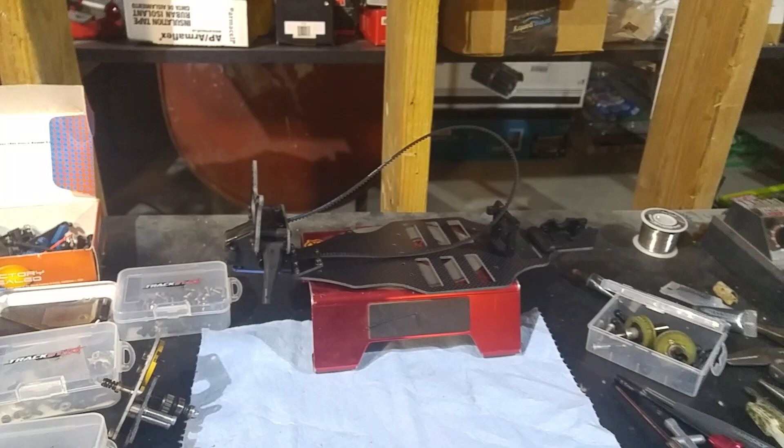Okay, so as you can see, I've made some progress here, finally, on my Kyosho Lazer ZXS Evolution restoration.

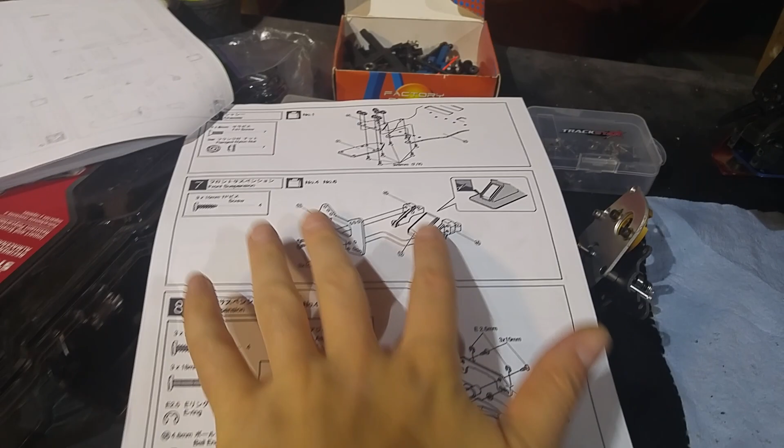I am doing a fair amount of this out of order, just out of personal preference for how to do the build. So the way the build starts is you start with the front kick-up plate, and then you put the top half of the front gearbox together, and then you do basically the whole front gearbox.

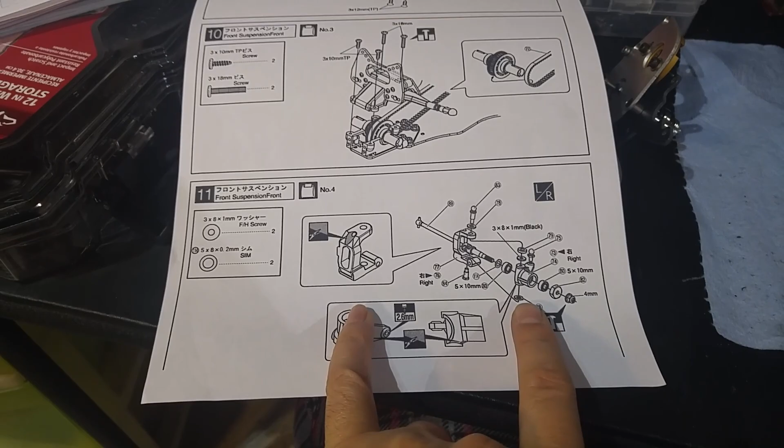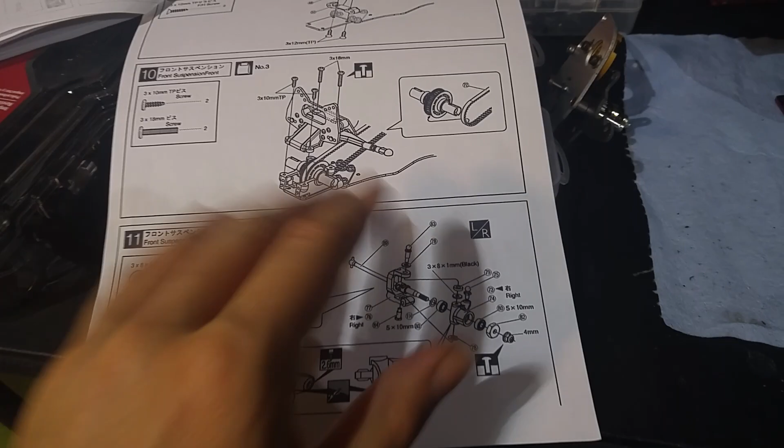Then you move on to the front part of the front suspension. So anything related to putting on turnbuckles, ball cups, caster blocks and steering knuckles, I'm going to wait till later for that. First thing I want to do is get the gearbox and drivetrains done, and then I'll move on to the suspension components.

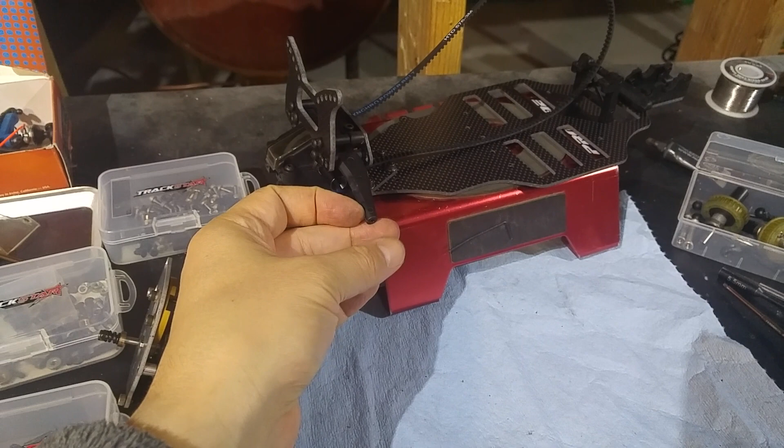That's just the way I prefer to do it. Also, I do want to get replacement turnbuckles because this comes with the original steel units, and I'd rather get titanium turnbuckles. I also noticed that the turnbuckles that go on the front here are like 15 to 16 millimeter units, and they're different between the left and right.

I think one of these is titanium, possibly this one. This one looks like a steel unit, clearly a different adjusting nut. So I just want to get the same of everything. I've got to put these aside and get new units. That's another reason why I'm waiting to do the suspension bits.

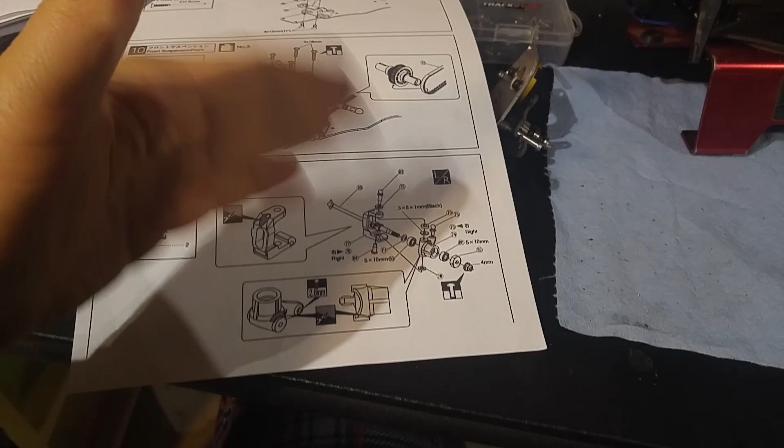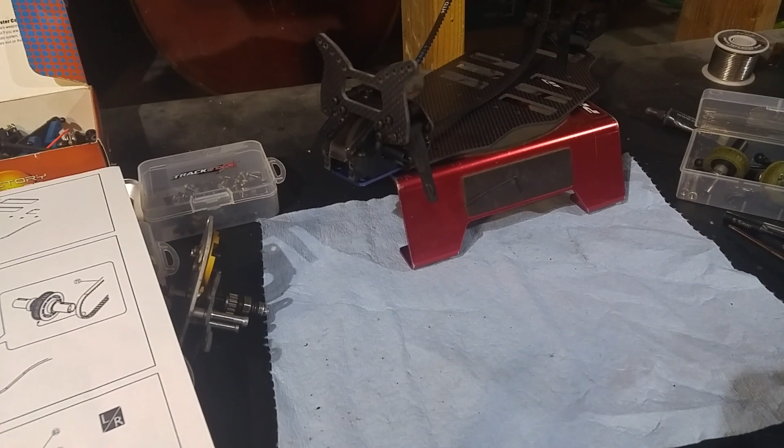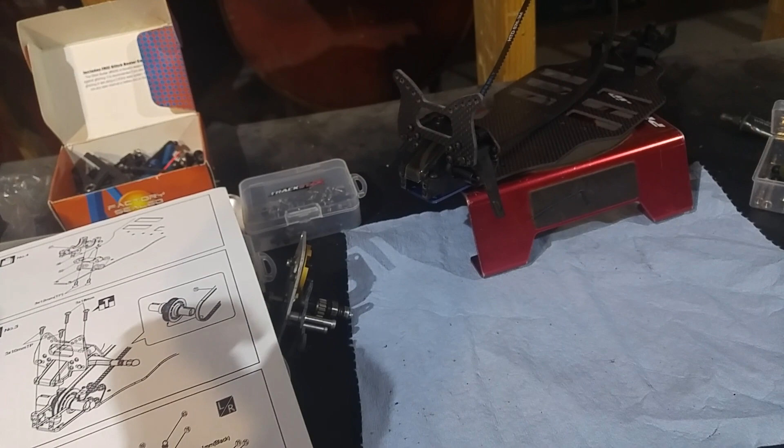So in any case, what have I noticed so far? Well, the front gearbox is certainly more difficult to put together than on a normal Lazer ZX or ZXR, because on the Lazer ZX, it's a two-piece gearbox. You have a front section and a back section, and the diff pulley mounts in from the front.

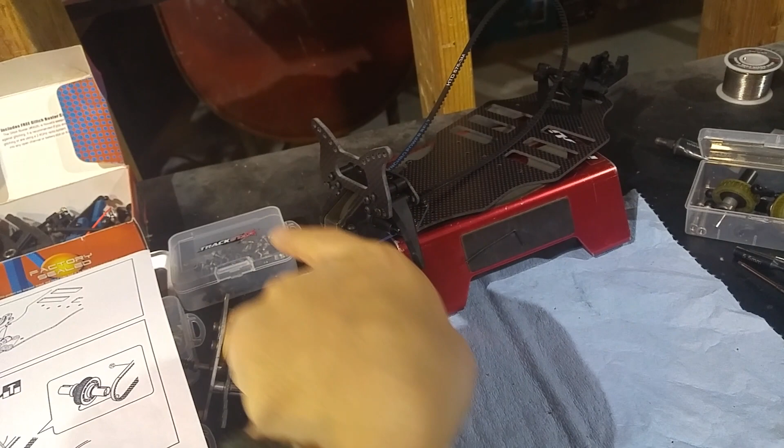With the diff pulley - my vocabulary is off today - the diff belt just comes in and wraps around it as you mount it in, and then you put the front cover on and bolt it on.

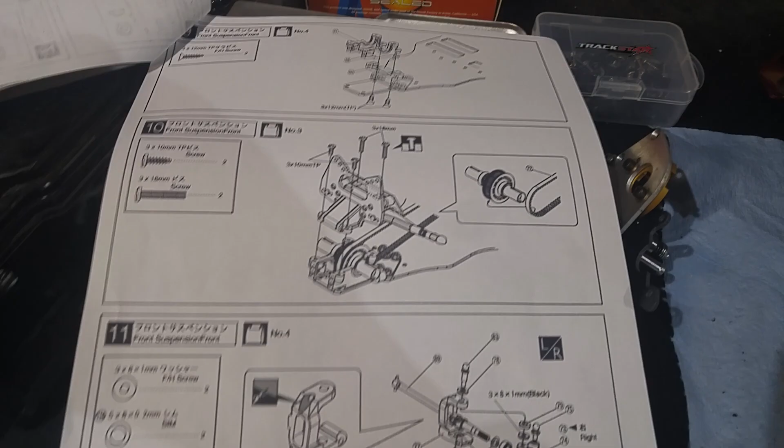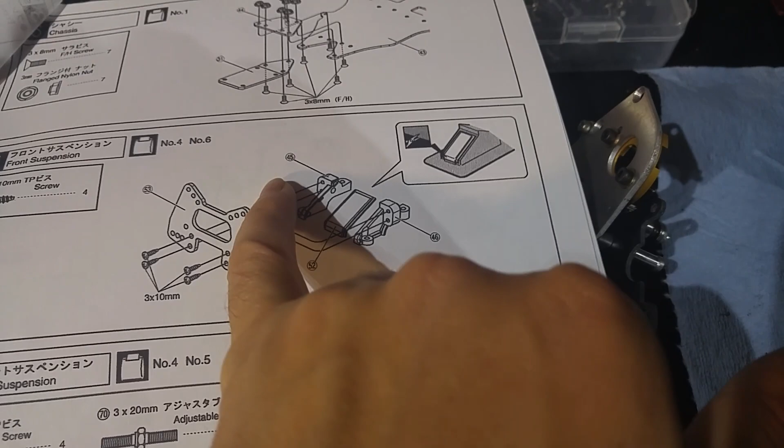This one has 4 quadrants for the gearbox: a lower left and a lower right, and then an upper left and an upper right. Putting the top section together is the most challenging because the way the left and right attach is through the front shock tower, so you're basically balancing 3 or 4 parts against each other.

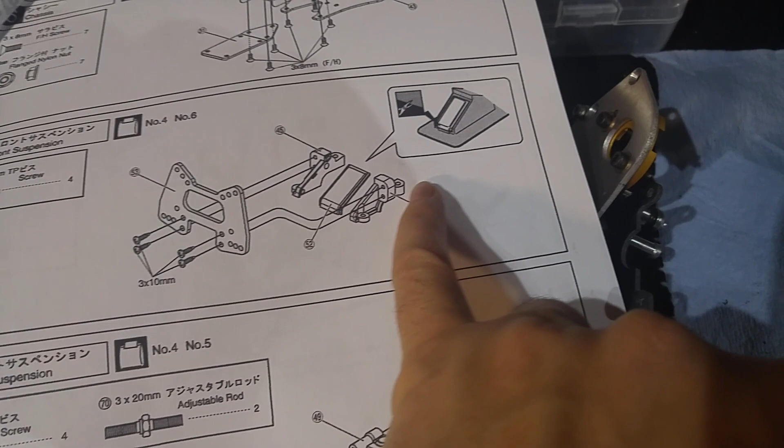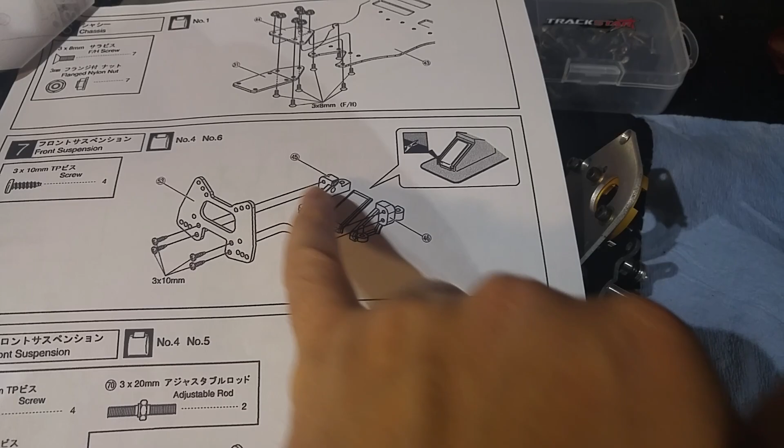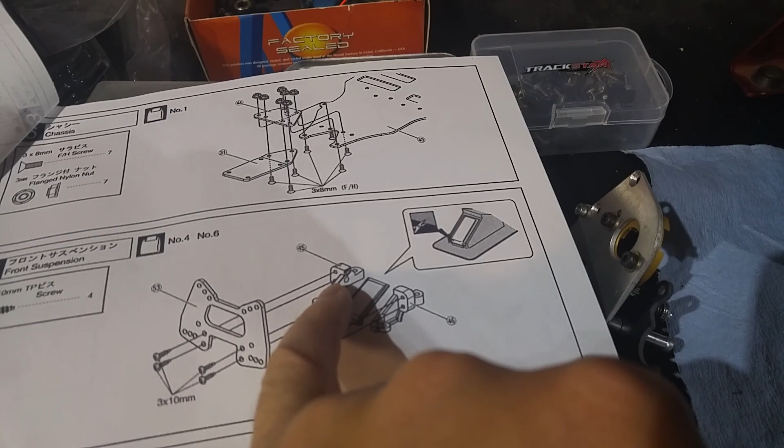So for instance, you might take these two screws, put them through the tower, into the top left quadrant of the front gearbox, and then you have this Lexan piece that goes in the middle between these two. That's this guy right here, your dirt protection cover. You have to hold that in place.

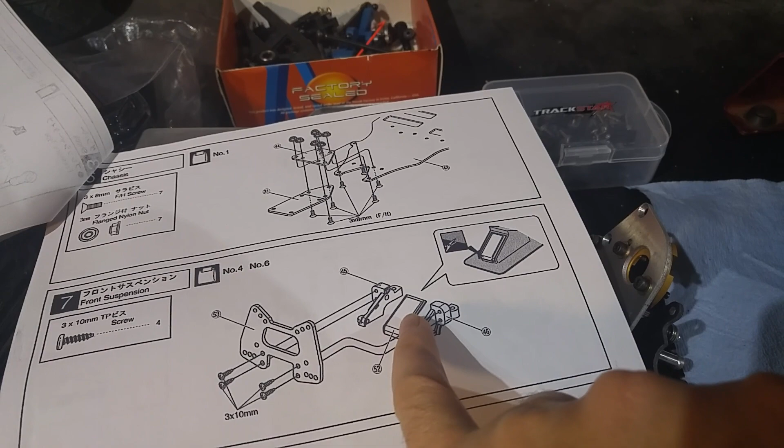There's nothing, I guess you could glue it, but there's nothing to actually secure that in place while you're mounting the other half of the top of the gearbox to the front shock tower. So you have to hold this in. There's a little notch in here where it kind of slots in, so you put that in, notch this one into here, and hold this in while you're screwing this in. It's a little difficult to do with just two hands, but clearly it's manageable, just kind of a pain.

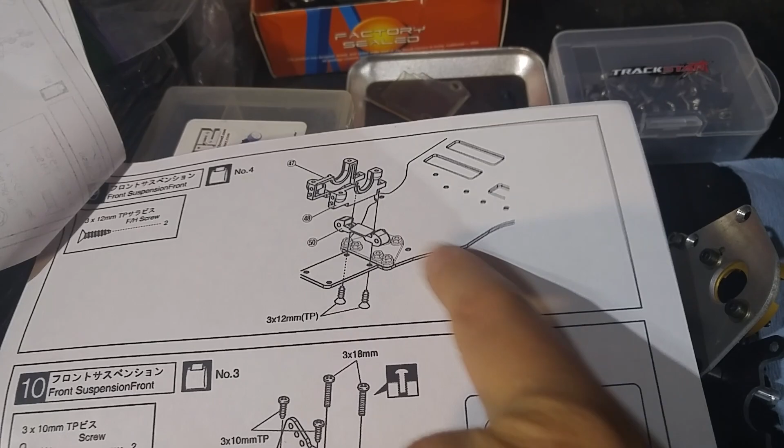So you do that, and then you mount the lower section. As you're screwing in one side here, this other side is going to try to move around, so trying to hold all that in place without it misaligning as you're tightening it down is also not fun.

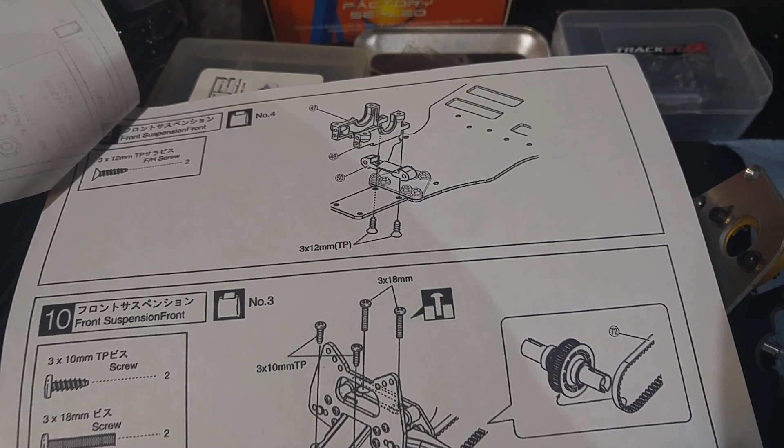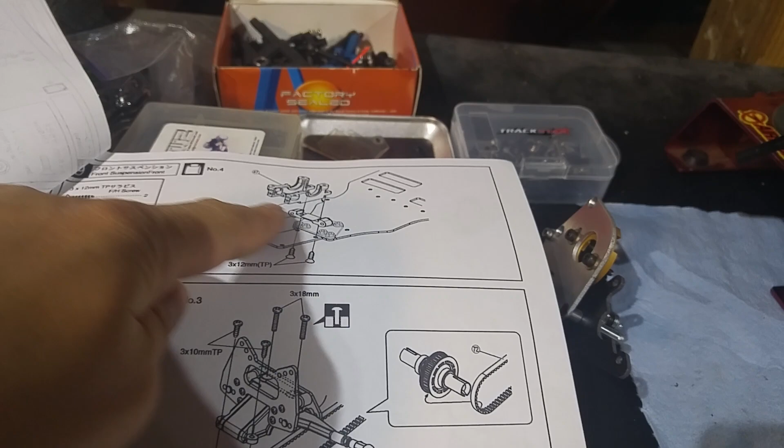This is the front rear inner hinge pin mount. This does look a little bit fragile. It's a different unit than what you have on the ZX and the ZXR. I think because on the ZX and ZXR the chassis was flat, and on the ZXS and ZXS Evo you have that front kick up to the chassis. So they had to redesign this inner hinge pin mount to accommodate that kick up, which means the inside of this is actually a little bit thinner than what you have on the ZX or ZXR inner hinge pin mount.

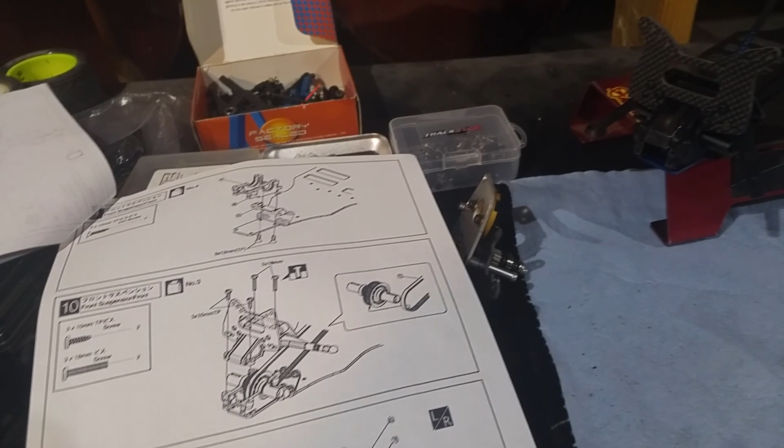That's another reason why I got all these 3D printed reproduction parts. I expect to order a couple sets of these just for my own internal consumption, because I don't know exactly what I can expect to break on the racetrack if I do race this.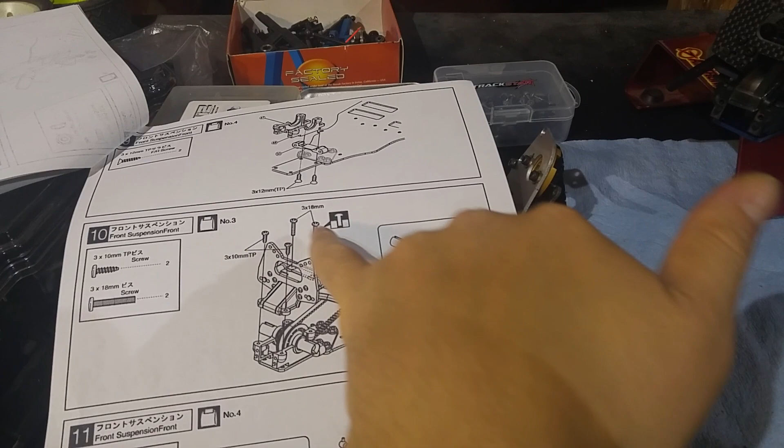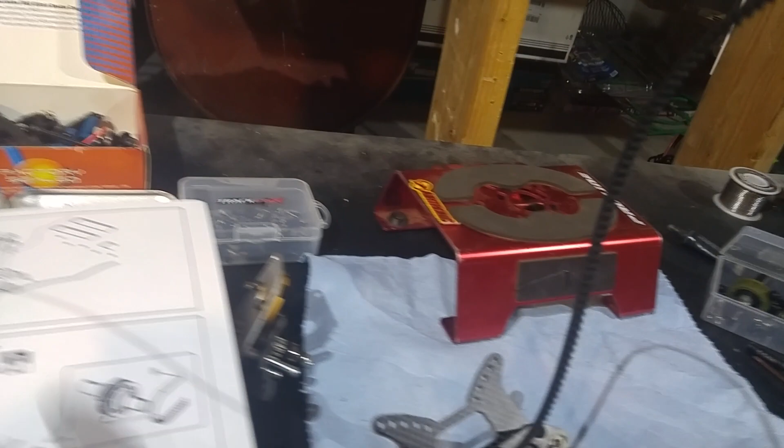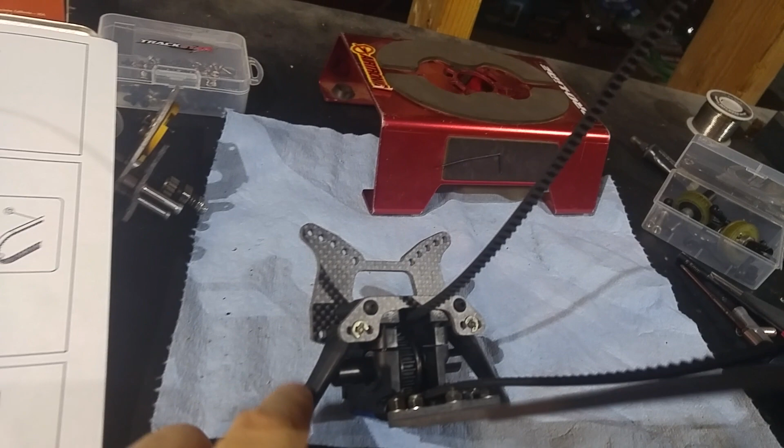Anyway, moving on. So then you put the diff in, you mount this, you screw this thing on. These back two screws here, you don't fully tighten them down because there's a gap between the top section, this piece here, and the top section of the gearbox. The upper deck is going to slot into there, and these back two screws are going to mount through that. So you don't tighten these all the way, just screw them in a little bit to hold it in place, and later on you take these out, put the upper deck in, and screw it back down. Okay, fine.

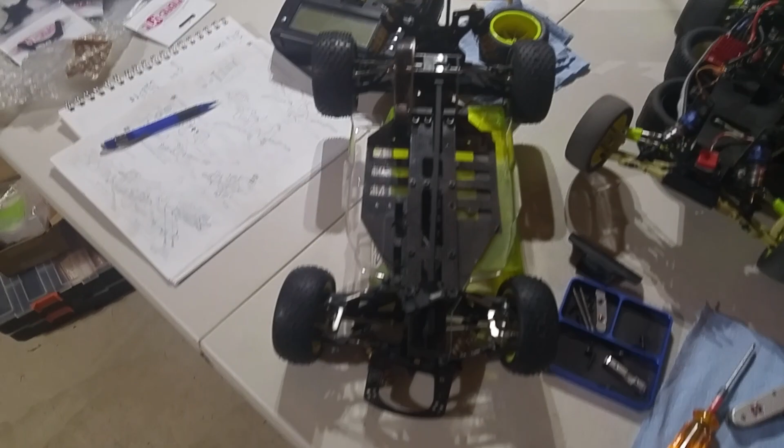So that goes together. What I am doing is replacing these diffs. I actually have over here a Laser ZX that I built some years ago, maybe 9 years ago or so by now. This was my first Laser project car, and I did get brand new diffs for it when I built it, brand new, slipper clutch, everything.

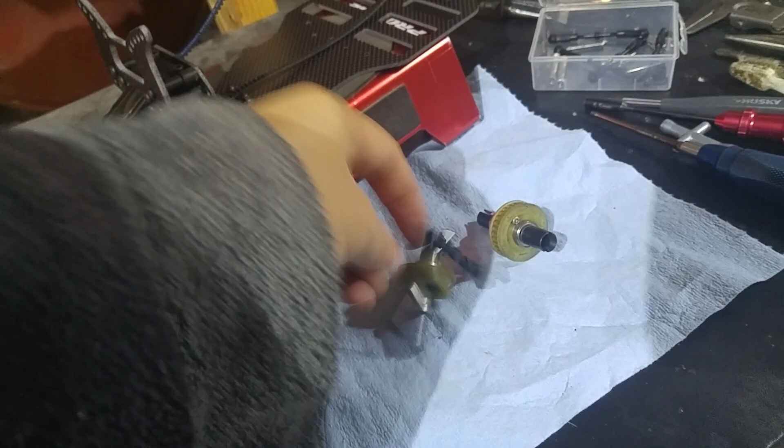And it was just sitting around, and I wanted the correct diffs, so to speak, the original style diffs for this gearbox, or for this Laser rather. Because these diffs here, one of them is actually a front one-way unit, and the other one is a ball diff, but the actual pulleys, as you can see, are white. And all the Laser models, the ZXR, the ZXS, came with black diff pulleys. So these particular pulleys, I believe, might be from Team Atlas. They could be aftermarket pulleys.

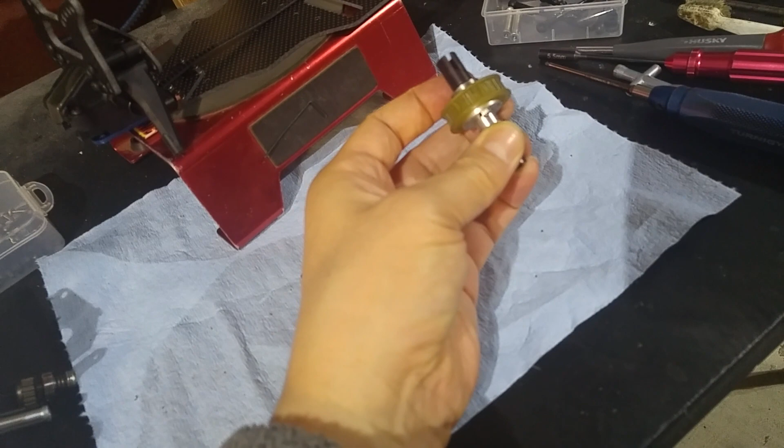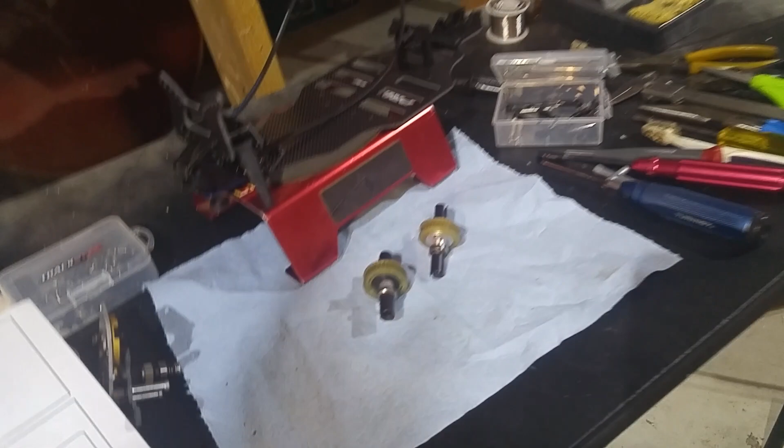Okay, fine, that's no big deal. But I like to have matching front and rear pulleys, and I don't want to use a front one-way. I hate one-ways. So if I'm just going to have one white pulley and one black pulley, I'd rather have two black pulleys front and rear, which means I gotta take that car apart and move those diffs to here. Those are brand new diffs, they've just been sitting in that car for years, but brand new. So I'm gonna put them in here and actually give them some use.

As to what I'll be putting in there, maybe I'll actually clean these up and put them in that Laser, because that Laser is more of a shelf car anyway. So that's probably what I'll do with these.

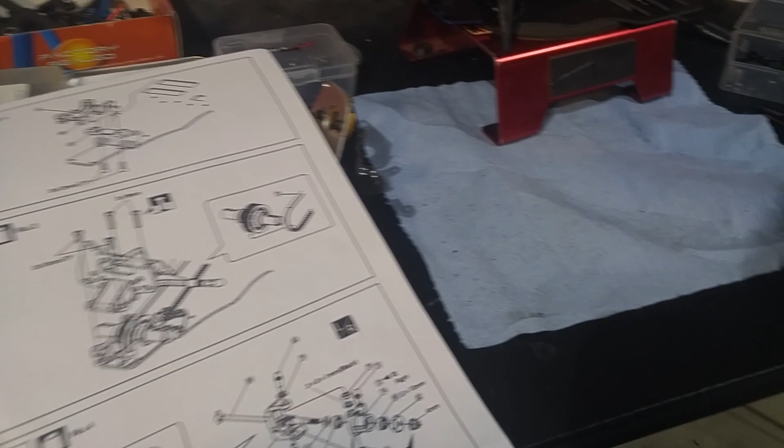Okay, moving on. So the front gearbox is kind of set. While I'm at it, I want to comment a bit on something. Even though the front gearbox is kind of a pain, there is something about it that I do like compared to the ZXR style gearbox, and it has to do with the types of belts you can use.

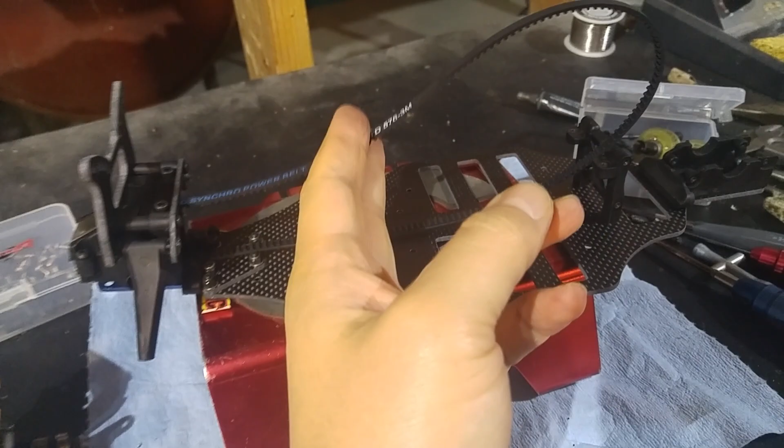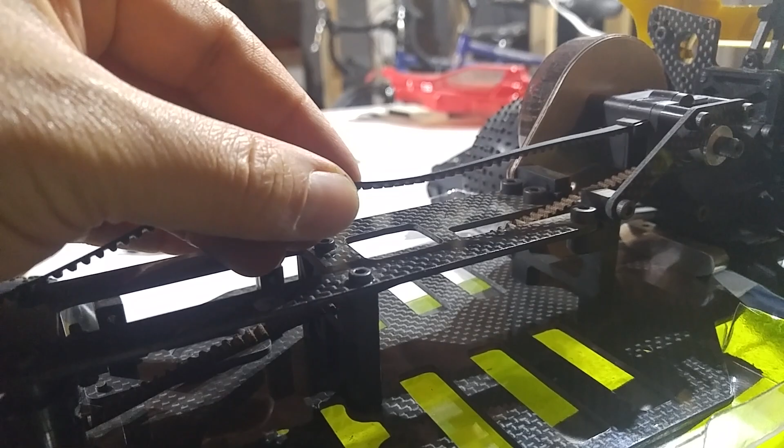On the normal Lazer, you need to use belts with a thin spine. You can see here, this belt has a very thin spine, and you can get these from Tough Racing. I have tried and tried to find a domestic source for these so I don't have to order from overseas, but I can't find them.

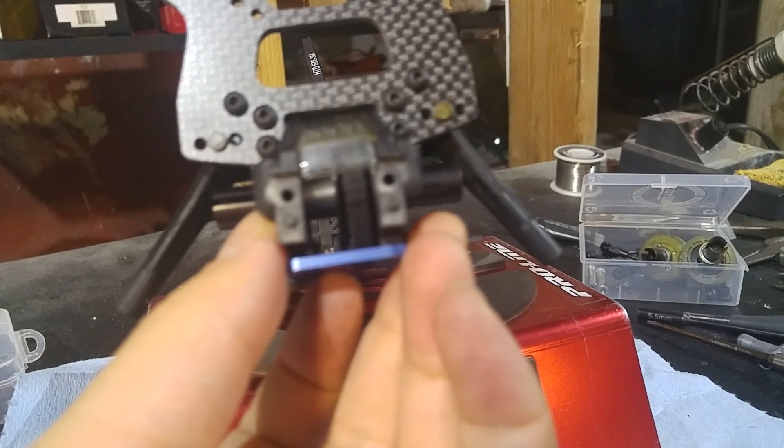The reason you need to do this is because the inside molding of the front gearbox has very tight clearance against the diff pulley. So if you use a more conventional timing belt, like one of these, which has a thicker spine, it's going to rub against the inside of the gearbox. But because of the way this is set up, there's a bit more room on the front for this to move around. The only issue would be the clearance between the diff pulley and the top surface of the kick-up plate.

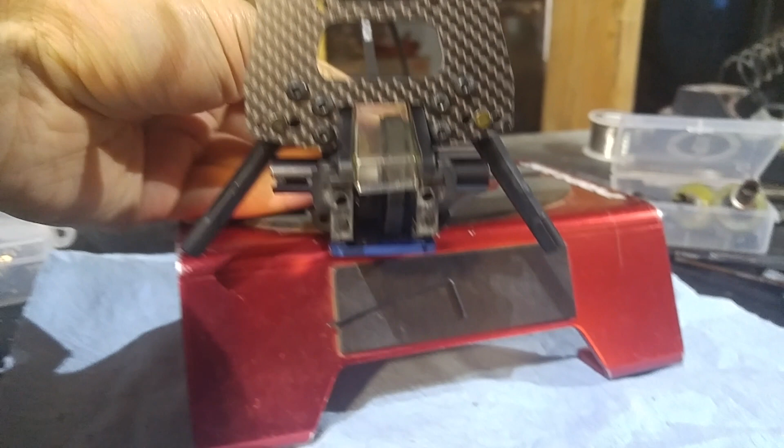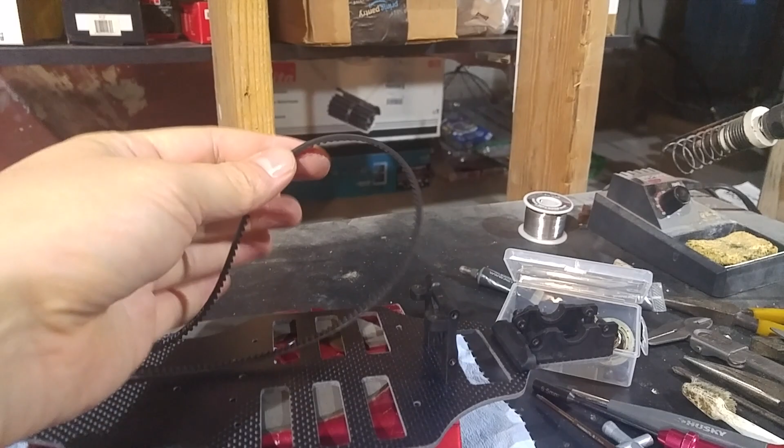I can't really do it with one hand, but as this tensions up, you do get a little bit of a gap between the kick-up plate and the belt, so it should spin freely. That's nice because it gives you a lot more options for places you can order belts from for this particular gearbox, the ZXS style gearbox. The rear is very similar.

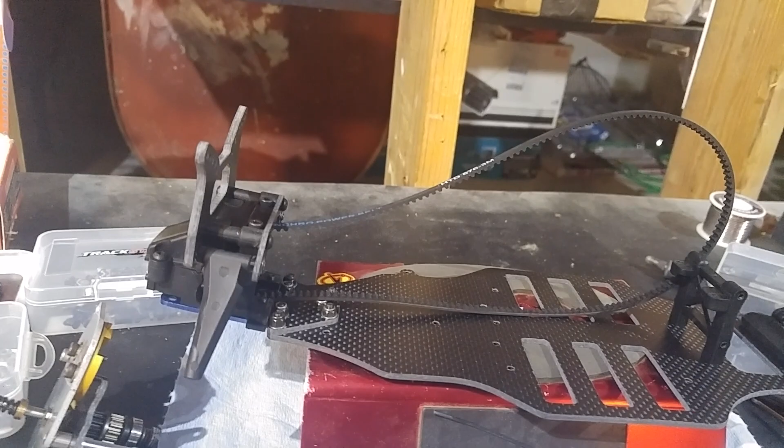In the rear gearbox, it's kind of an open style with a Lexan cover on the back. So I expect to be able to use belts like that.

By the way, the front belt is 3mm wide, 576 in circumference. I don't know how many teeth that is, I forget, but I did count the teeth on the original belt, which is a bit worn. So then I just ordered a bunch of replacement belts that have a thicker spine. I'm glad these appear to work.

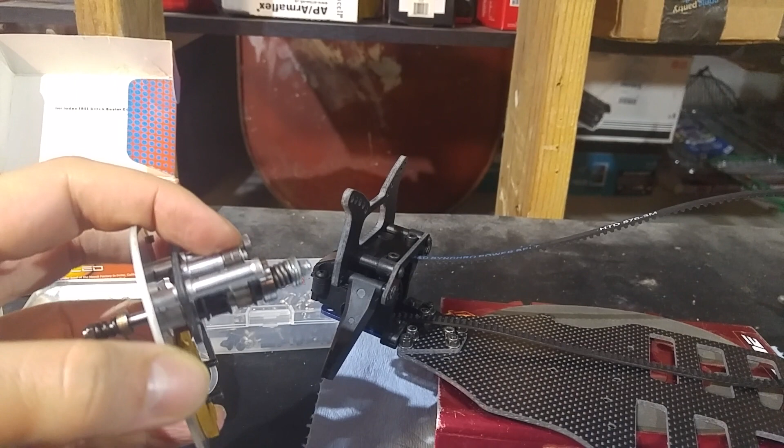Time will tell as I go through the build how that actually works with the rear gearbox, because I've already put about half of it together. There is a roller bearing here that holds the belt down onto the center pulleys, and if the spine is thicker on this belt, it might not play nicely with this particular roller bearing, because of the clearance between the belt pulley and the outer surface of this bearing.

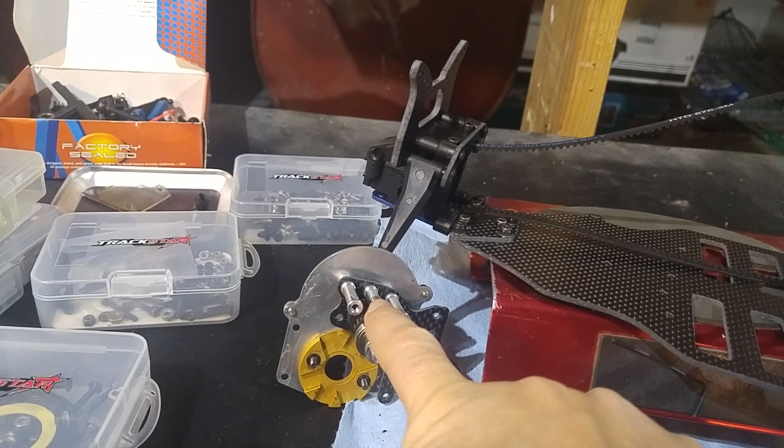I'd have to imagine this was set up for the original belt, which had a thinner spine. So if you add maybe half a millimeter or a millimeter to the spine, that's going to put a lot of pressure there - it could cause binding here, even though there's a bearing. We'll see how that goes.

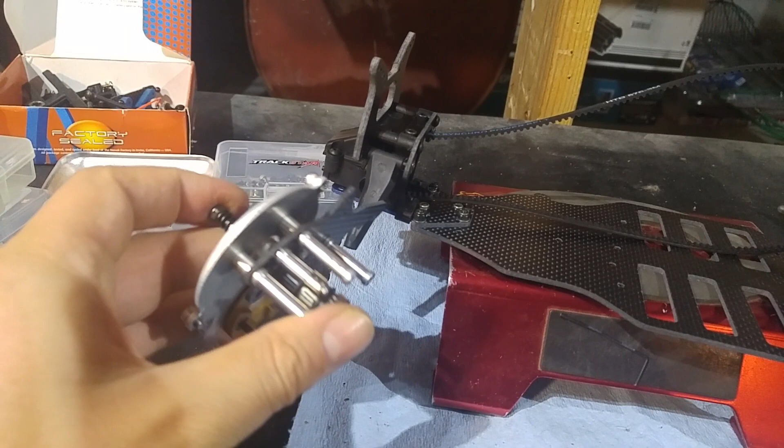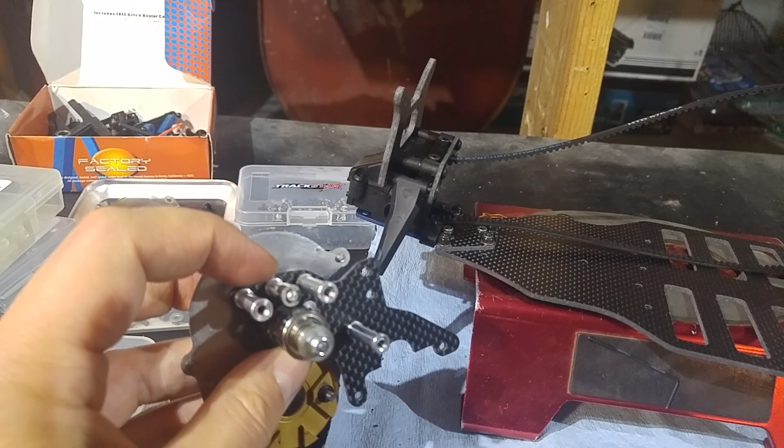If it doesn't work out, I'll have to figure out maybe a smaller bearing to put here, or maybe since this isn't an original carbon fiber part, I can take the hole this mounts into and slot it, so I can move this up a little bit and make it somewhat adjustable. We'll see how that goes.

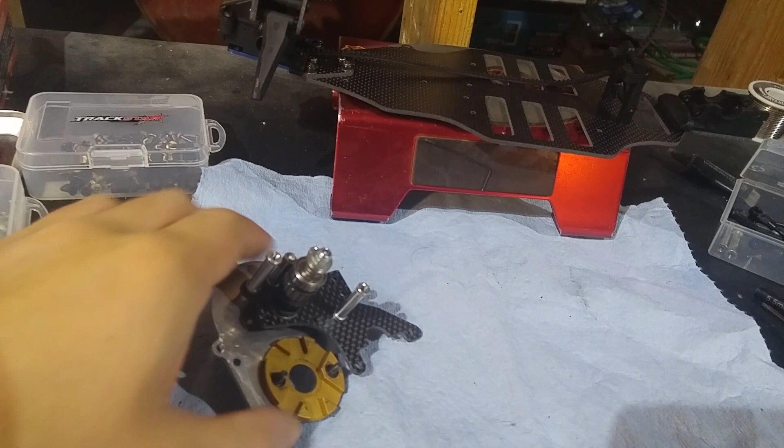Let's see, what else did I have in mind to discuss here? Just putting this rear gearbox together is, as you can probably tell, not exactly straightforward. It's not like the Lazer ZX and ZXR rear gearbox like this guy here - I apologize if the lighting is poor - but this is basically a three-piece gearbox.

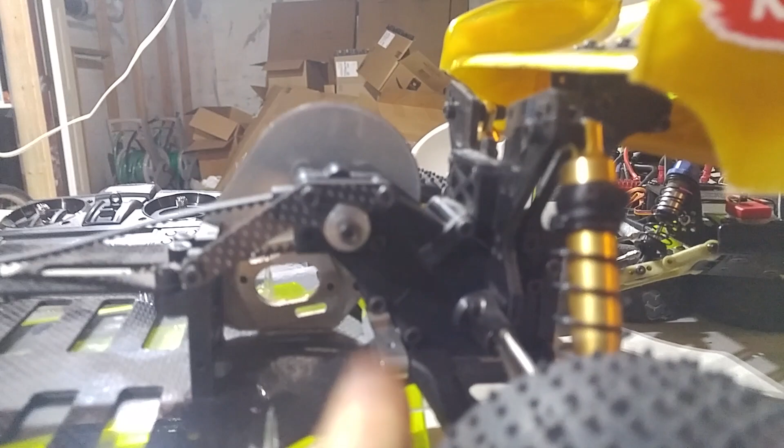You have a main body, and then there's a little section on this side that you put the diff in, and then another plastic section right here that's part of the lay shaft assembly, as you assemble the lay shaft and assemble the gearbox.

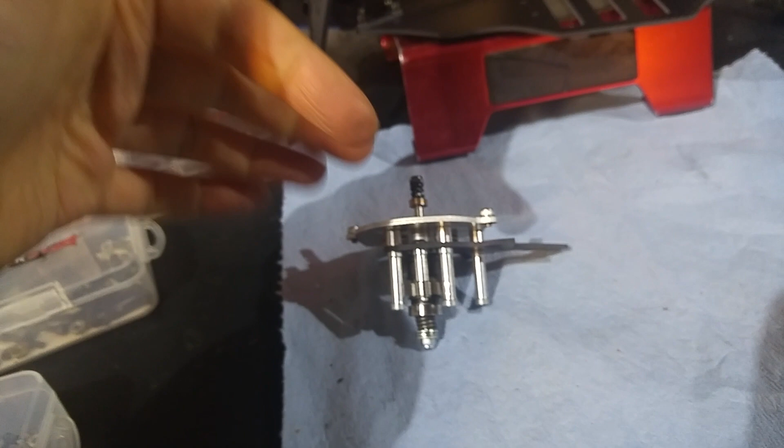This is sealed, great for keeping dirt out, and it's relatively simple to put together, with the exception of how the lay shaft goes together. That's always a bit of a pain on these Lazers. But this one, not only are you dealing with the lay shaft assembly, it's also a bunch of spacers, and you have to put multiple spacers in at the same time and screw them in while holding everything together. So, I guess it's entertaining.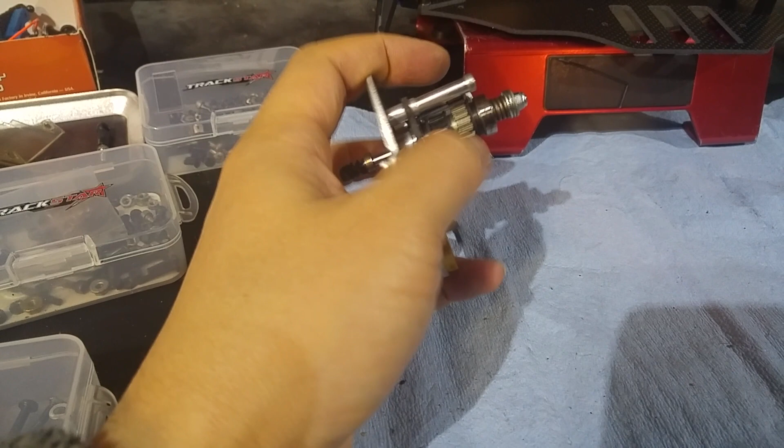That's really where I am now. I guess one final thing I want to point out is I think I figured out a way to lock or almost lock this center front pulley. So the way this mounts onto this particular lay shaft, there's a one-way pulley, and there's no slot on this particular section of the lay shaft to allow you to lock that pulley down.

Although it's kind of strange because the ZXRR also has the same type of slipper clutch unit. It's, I forget what it's called. What's it called? The hyper clutch, sorry. And that has a different pulley arrangement, just like the particular types of pulleys that are used on the ZXRR than what you see here on the ZXS, even though the slipper clutch itself, the hyper clutch unit, is exactly the same. So this lay shaft is probably custom to the ZXS, which is a little odd, I suppose.

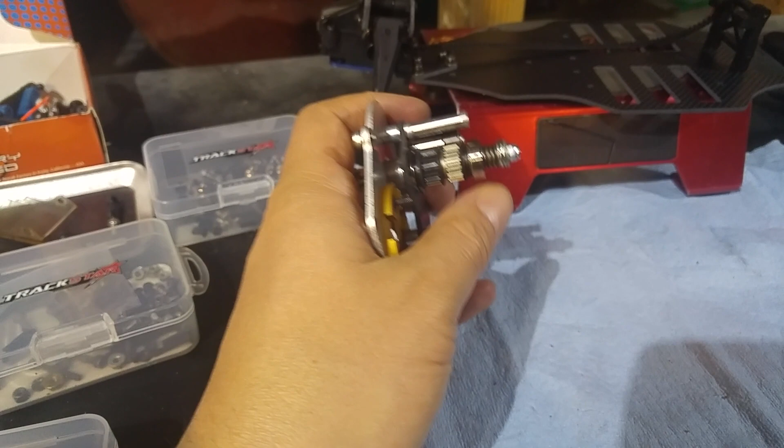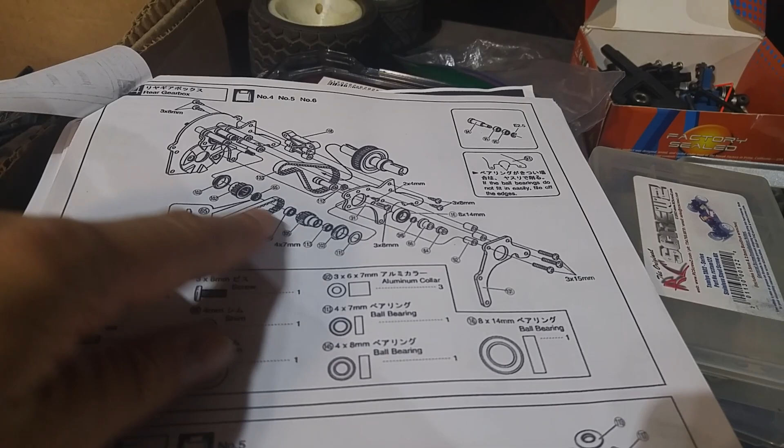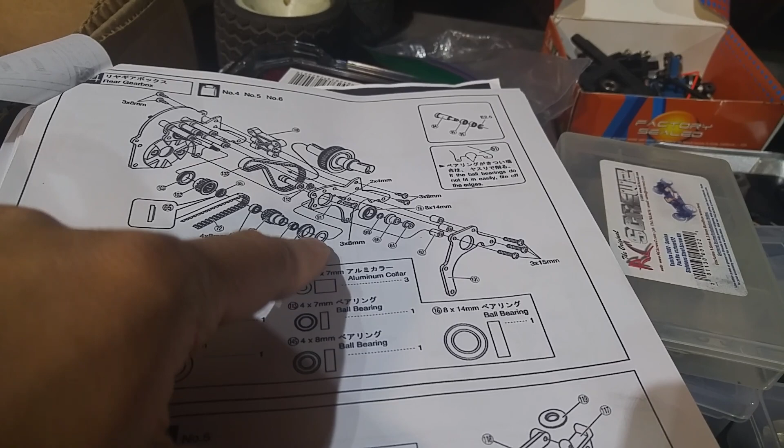So that means I need a custom solution here. So essentially all I did was, there's a 4mm, like a 4x6 shim that goes on this side that connects to - let me just get to a picture. Yeah, so here is the outer portion of the lay shaft assembly. All this stuff here on the lay shaft. So basically this is your one-way pulley with a bearing, and then this little cap, a washer, and this big fat bearing, and then this little guy here is like a 4mm inner diameter shim.

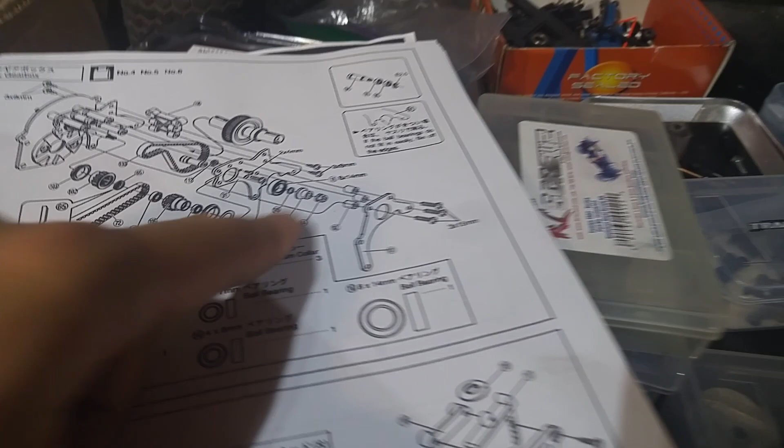Essentially it's a shim. And normally there'd be this little plastic thing. Where did I put that? I put that over here, didn't I? Where the hell did that go? Am I already losing parts? Oh, here it is.

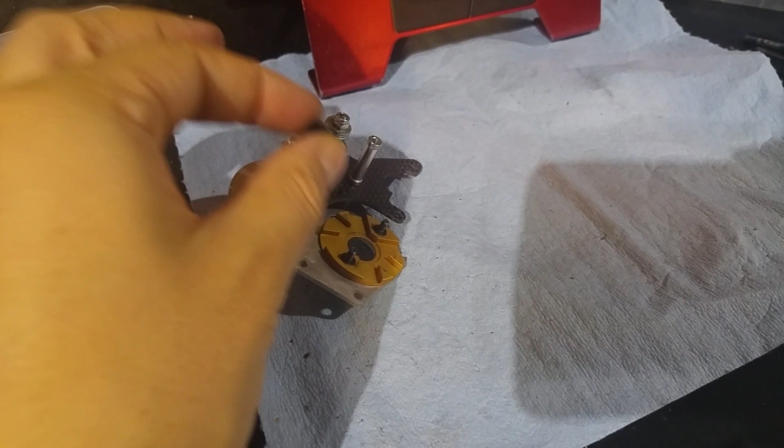This little plastic piece right here would go on to the end and just sort of hold everything in place, and then a plastic nut you put on the threaded end here and just sort of, it holds it in place. But that means you get full one-way action on this pulley.

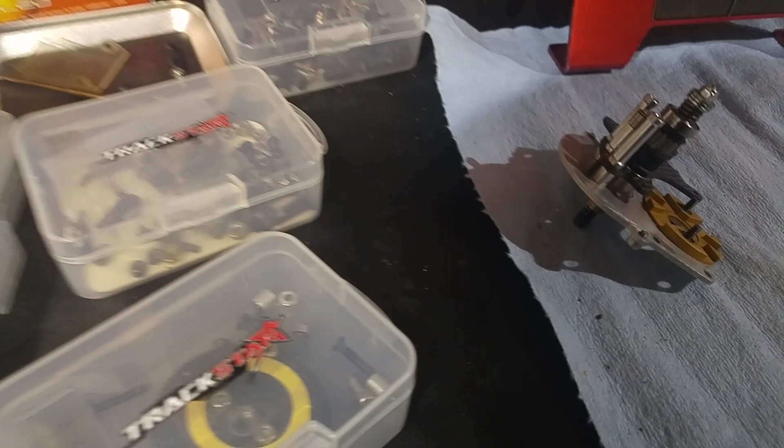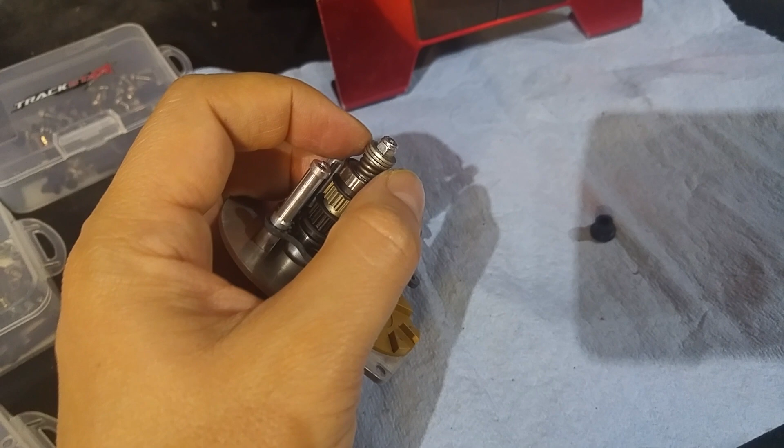So what you can do instead is, this is the slipper clutch spring from one of several Outlaw Rampage Pros or Kyosho Pro X's that I have lying around, because I got a few of those gearboxes. So I just took that spring. It was about the right size. I put it on, and then I put some washers on at the end to basically reduce the slack I have, because that particular spring is a little bit on the small side.

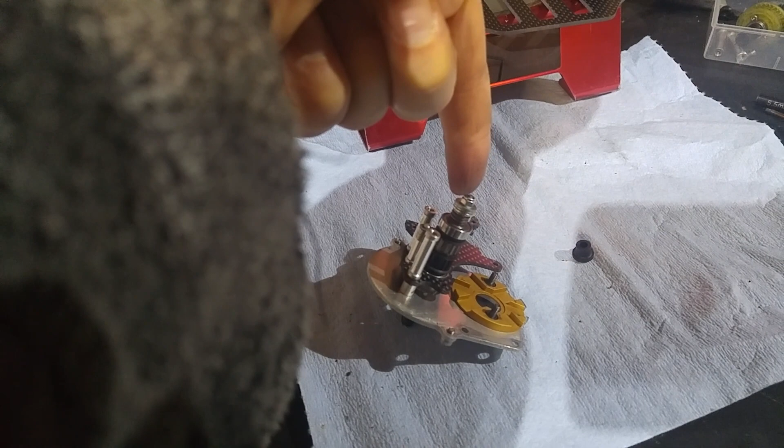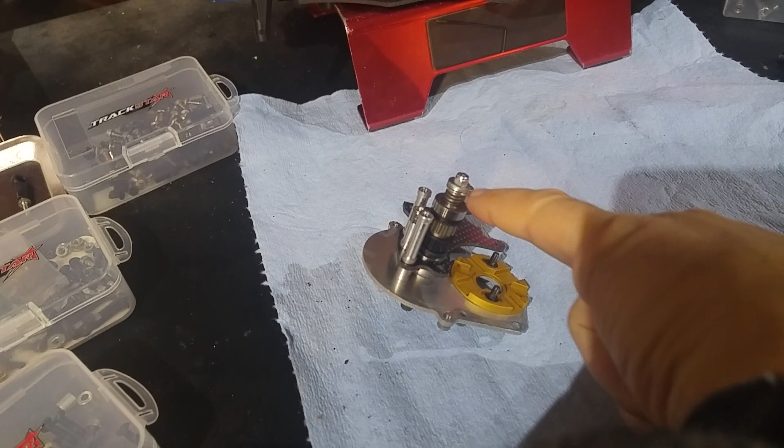So I needed to add some effective thickness here so that when I screw this lock nut down, by the time I hit the end of the threading on the lay shaft, I need enough tension in that spring to push that shim against this bearing, against this one-way, to sort of bind it up.

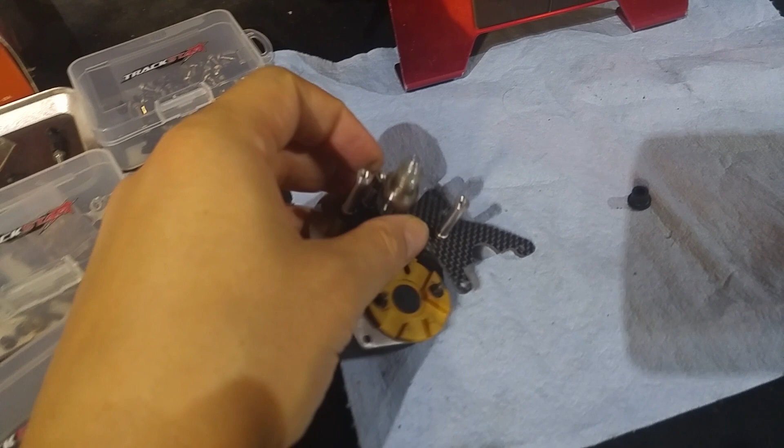Okay, so you can use a longer spring and fewer spacers here, but ultimately you need a spring here. Very similar to what I had done on one of my Yokomo YZ10s, although in that case I didn't have a threaded section of lay shaft on this side. I had to use a different trick. But basically use a spring so you can hold some tension against that one-way. And this seems to work very well. It's not completely locked, but you do need a fair amount of force to force this one-way to move. So that should be, I think, good enough for what I would like to use it for.

Alright, so I'm already about 18 minutes on this video. That's really where I am right now. So I'm going to try to finish up the rear gearbox and then move on to other parts of the build. And yeah, that's it for now. Thanks for watching.